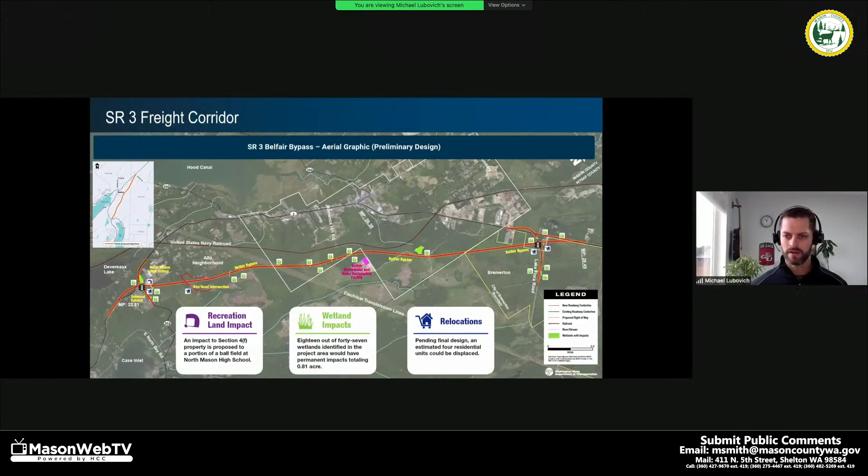With that, the county applied for and received some funding to work on a sewer extension project. I pulled a graphic from one of the early documents that were prepared before the design actually was started.

The original concept, as you all recall, was let's find a way to partner with the local agencies. We have City of Bremerton that has the Puget Sound Industrial Center nearby, right across the county line. Also the Port of Bremerton has their own sewer treatment system, their loss system.

The idea was, can we run a sewer line that's parallel to this freight corridor highway, and bring more customer, more service, more flow into the Belfair wastewater reclamation facility.

This is a graphic that was prepared early on in the project. You can see the existing infrastructure and then the new proposed highway in red, and this tealish color would be the idea of the sewer system.

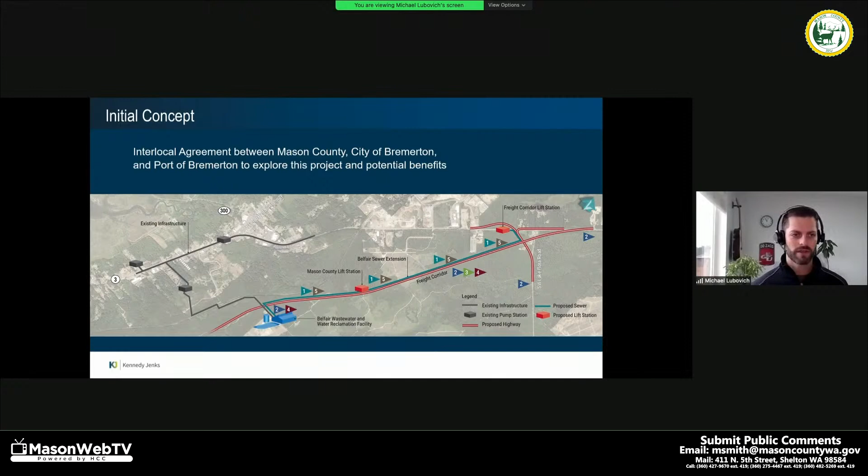There were interlocal agreements made between those other agencies, and we kicked things off with a stakeholder goal meeting. We had a couple workshops. We had some discussions with the different stakeholders in terms of what are the goals.

As part of this project, defining this project still, we have an idea of what we want to accomplish, big picture, but what are the other parties' goals in this project? For Mason County, it was really wanting to see what involvement the other local partners want to have in this project, and we also would like to maximize the use of our existing water reclamation facility's capacity.

We have capacity to spare, and we'd like to see who's interested in partnering with us. The city of Bremerton's goal was, they obviously have that Puget Sound Industrial Center that they are required to show growth and continue growing.

It's their industrial and manufacturing designated facility or area, so there's pressure on them to grow sustainably. They were interested in exploring this project to see if they could defer development of their own water reclamation facility, which was part of their general sewer plan or comprehensive plan, and see if it was more cost effective to send flows across the county line.

The Port of Bremerton really wanted to defer expansion of their existing treatment plant. There was a planning document back in 2012 that said at some point in the future, they would have to replace that treatment facility with another water reclamation facility.

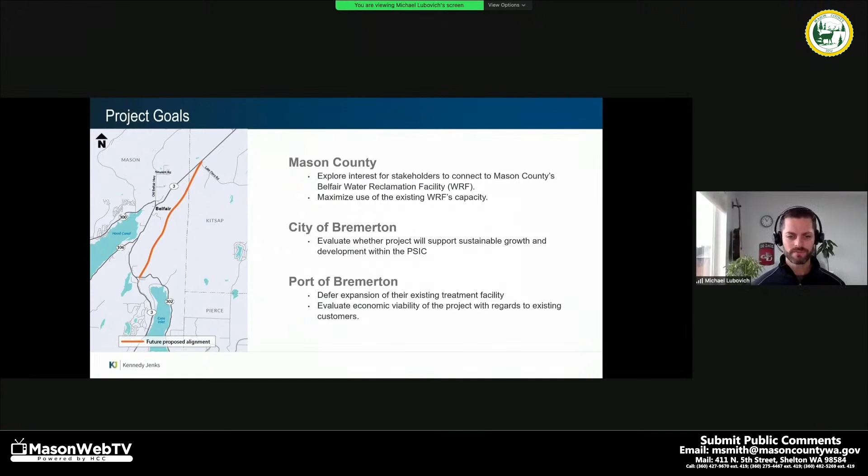As we got into the project, we kicked things off with alternatives evaluation, understanding the different goals of the different agencies, and what are the many options we have for routing sewer from across the county line and getting it to the WRF. If we were to put a long sewer line that paralleled the highway, what would that look like?

As we got into it, we developed several alternatives, had some workshops again with the stakeholders, and ultimately settled on what we called Alternative 4, which maximized the use of existing infrastructure. Instead of running a sewer line that paralleled the highway, the idea would be to run all the sewer as flow is starting up as development is occurring on the north end, the eastern end of the UGA, and beyond the PSIC area.

Why don't we start sending flow through the existing collection system, maximize the use of those assets, and then in the future, at some point, if we're at capacity, we can run a separate force main or pressure line from the Puget Sound Industrial Center to the WRF.

The benefits of this are better operational flexibility. Construction can be phased to serve near-term planned growth as well as future long-term growth. It wasn't dependent on the WSDOT design, so we could separate that interface between WSDOT's project and this project, and it maximizes the use of the existing capacity that was already built and constructed.

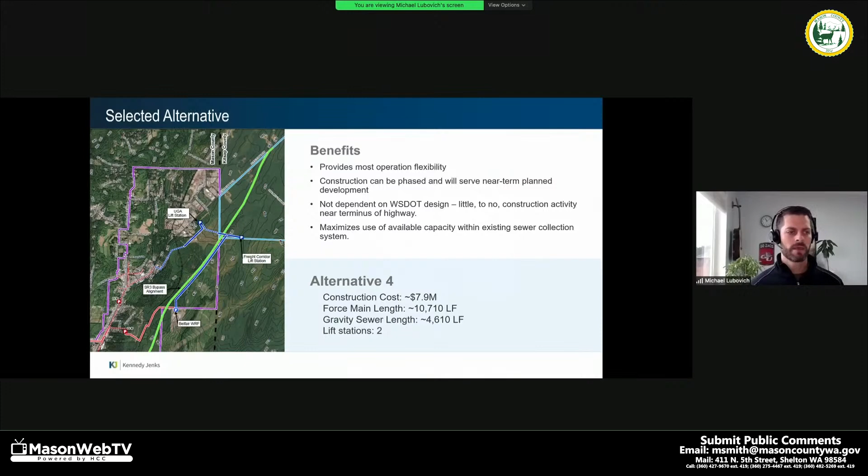Originally, we were costing this project out at around 7.9 million. The construction project included a little over 10,000 feet of force main and 4,600 feet of gravity sewer and 2 lift stations. As we got into pre-design, we continued to refine this alternative.

Looking at the timing of construction and development we expect to occur in the urban growth area, in the Puget Sound Industrial Center, we decided it would be best to phase this project into 3 phases. The first phase, which is actually the project we're going out to bid for here, is what you see in this reddish, salmon color, which includes an extension from the post office up through what is currently being constructed as Olympic Ridge.

I want to say the name has changed a couple times. The development crosses the railroad, the Navy's railroad tracks, and runs up through the UGA to the northeastern portion, but staying south of Highway 3.

In the future, there would be a second phase where Bremerton would construct a pump station and some combination of gravity and pressure main that would run sewer to the Belfair collection system. Then, well into the future, once capacity within the existing collection system has been met, City of Bremerton would construct a separate force main that would run sewer directly to the WRF from their Puget Sound Industrial Center.

That freed up more capacity within the collection system to be able to handle more growth within Belfair's urban growth area. So this phased approach for phase 1, total construction costs come in between 4.7 and 5.7 million dollars.

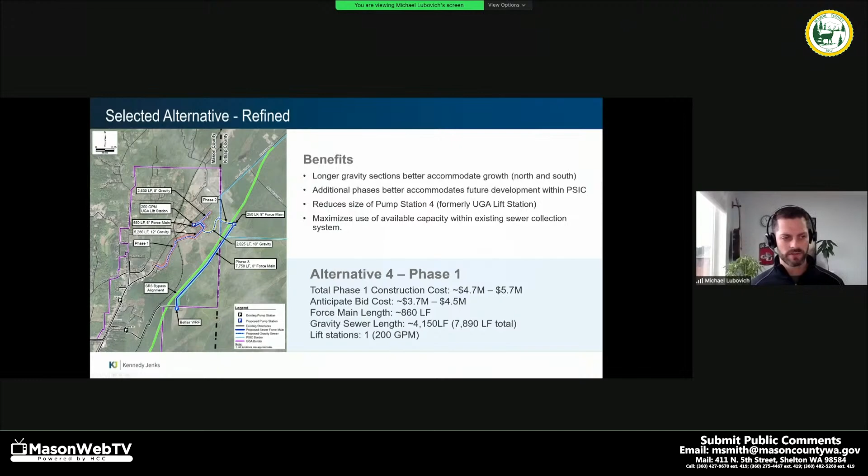I mentioned this Harbor Custom Development is currently constructing. I think they've constructed about half of this leg so far, and they're continuing to work on constructing this portion of the sewer. Their responsibility stops essentially at the Navy's railroad tracks.

So there is a permit application right now to cross under the Navy Railroad. Their review period takes about a year. In this case, it'll take a little longer than a year, which is what we're anticipating for them to review and approve this permit under their railroad.

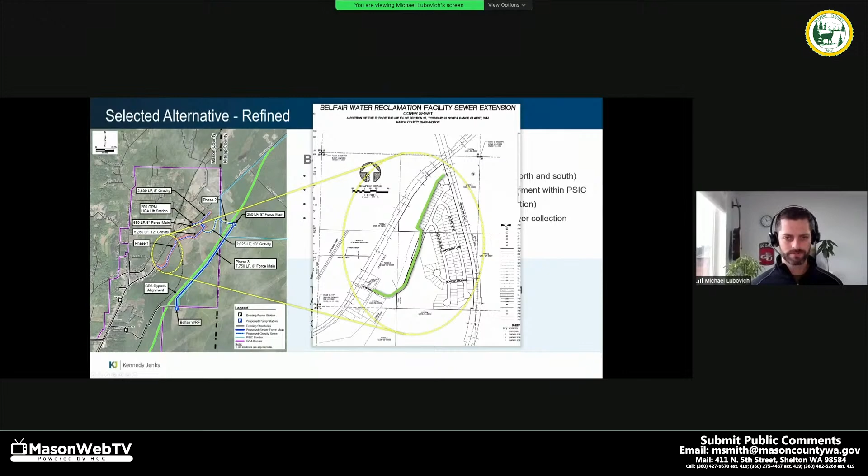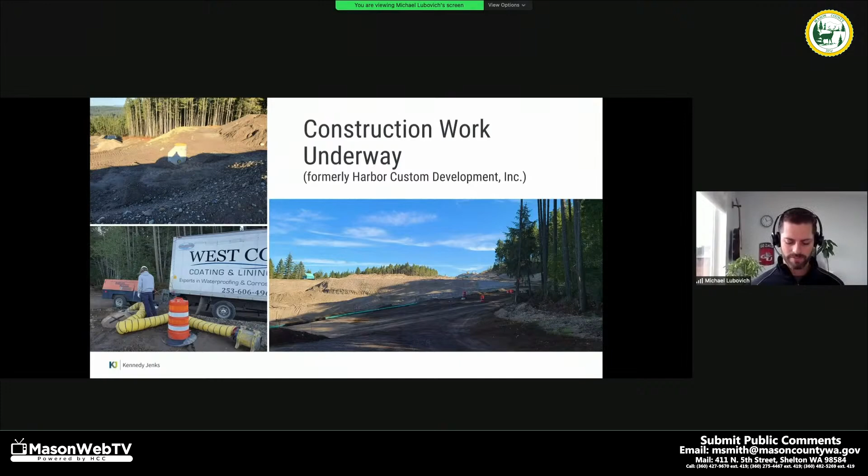So the design project that we will go out to bid in the next few weeks, pending commissioner approval, is what I'm showing here. This is a summary page taken from the bid documents, or design documents, that shows the different sheets and essentially the extents of the project.

You can see from the railroad going east and northeast from there, across this frontage road. The pump station is going to be located here adjacent to this, I believe it's an existing church. And then the sewer extension continues up to Log Yard Road and crosses to the other side, so that any sewer extension that occurs in the future would not have to rip up the road itself.

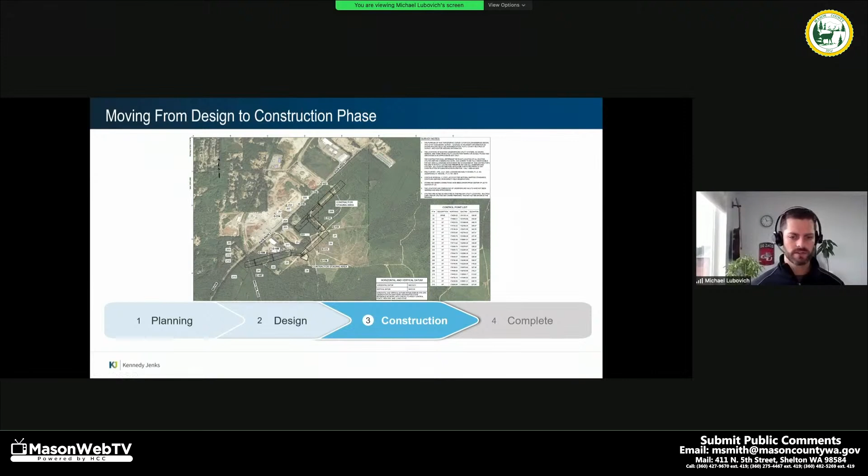So as I mentioned, we're heading into the construction phase, denoted by this blue construction symbol, number 3. Here is the anticipated construction timeline. Assuming we get authorization to advertise in December, it's roughly a 3-month process to get the contractor notice to proceed.

We're right in the sweet spot for the construction window. Getting them notice to proceed in March gives them time to procure and get ready for the dry season, where they can install the trenchless crossing under the railroad, the pump station, which requires deep excavation, and other portions of the sewer that also require deep excavation. It's a nice time to be out there constructing, expecting substantial completion, or beneficial use of the facilities, so we can actually receive flow through the sewer system by the end of February of 2023.

With that, are there any questions? Thank you.

Commissioner Shutty, would you like to start? Yeah, I don't have any questions at the moment. Okay, Commissioner Trask? Yeah, I don't have any questions either. Appreciate the presentation, it answered some of my questions already, so I appreciate that. Good.

I've got quite a few questions, Michael. Okay, lay them on me. Some of them might be for Loretta, though. Loretta, let's see, what is the total expected build out of that phase up there for connections? How many do we expect that we can get with the current zoning?

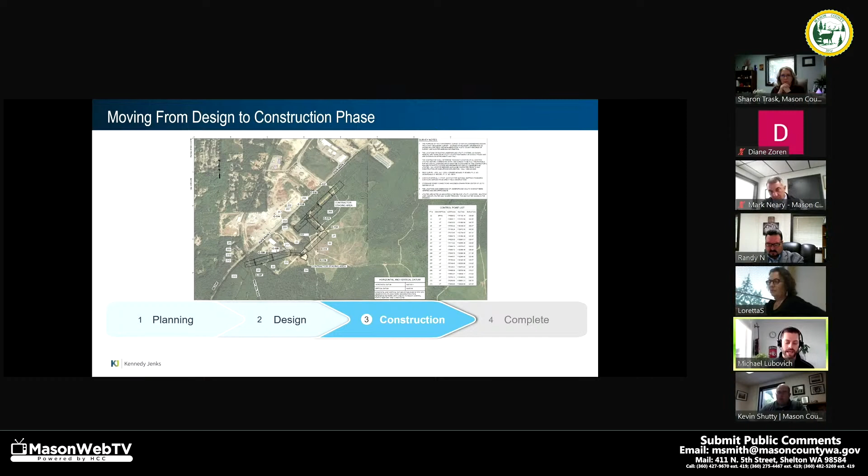And this is normal for us to go out to bid and to build before we have permission? It can occur this way, it can occur both ways. For this project here, we are anticipating substantial completion until much later. So that gives us time to work through the permit challenges or any kinks or questions that the Navy might have. We have language in the contract documents that basically say the contractor cannot proceed with this portion of the work until the permit is received. So in terms of the project itself, there would be some concerns if this delayed another 9 months. But this work can certainly happen, this crossing can certainly happen towards the end of the construction period.

Loretta, when does the MOU expire with the city and the port? The MOU, I'll have to look at that, Commissioner. Okay, please give me that. Yep.

And just to follow up on Michael's point, the bid has been structured to schedule, anticipating that the permit would not be received until April or May. We've had every indication that it should be issued, that there's no concern. It's just a matter of getting through their process.

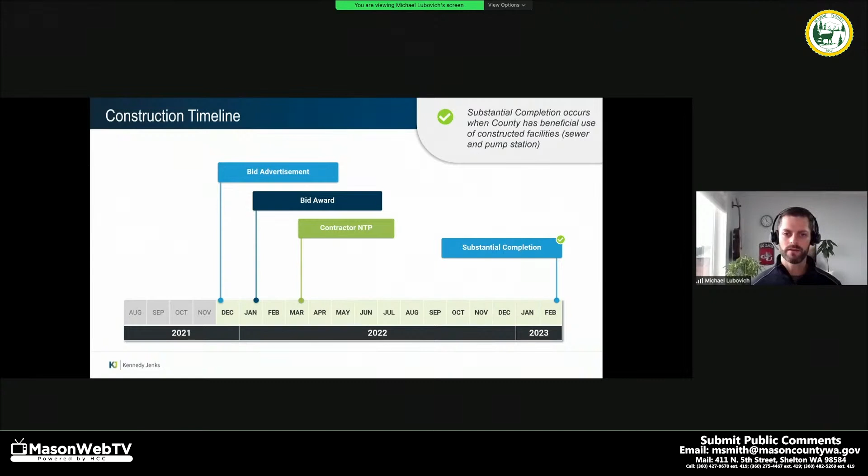I think the other approach, which they were more interested in, was paying a capacity charge when they started connecting to the system. There's a certain amount of the project they'd be obligated to pay up front to reserve that capacity, because if the county were to build it themselves, they wouldn't necessarily have sized it the way we have. So there's a percentage of the construction cost attributed to upsizing the line, which they'd be responsible for in this construction phase, and then they'd pay a connection charge like any other customer when they started connecting. Those are the two scenarios that need to be worked out between the city of Bremerton and Mason County.

So I guess my question is, the county and the area of Belfair have invested a huge amount of money, aside from just a hookup charge. Has there been any conversation with the city of Bremerton or the port to pick up any of that? Or do we just literally treat them as though they're part of the county and have already paid for part of this $60 million plan?

Commissioners, we have not gone through any other additional analysis or any discussion or decision making with the port and the city at this point. If there are other scenarios we'd like to evaluate, absolutely we can get to work on that and come back to commission to present those.

Well, if we're saying this is one of the reasons why we're doing this, but we don't have any of that information, then why are we saying this is one of the reasons why we're doing this? I guess, but that's a comment. I'll leave that for another time.

Next, has anybody had any conversations with the city of Bremerton or the port about only using this for their industrial needs, and not allowing them to rezone and create a commercial retail core just above the county line, using our system to take away our tax base? Has there been any conversation with them at all on that? No. Okay.